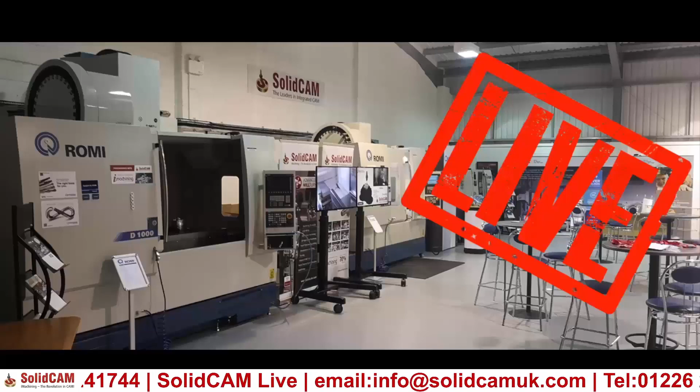Today we have a selection of partners for you with machine tools, cutting tools, work holding, measuring, simulation, testing, and together we'll be demonstrating how we can collectively show you a total solution for manufacturing and machining. So throughout the event we'll be using SolidCAM software, showing the various strategies and including our powerful iMachining for fast metal removal.

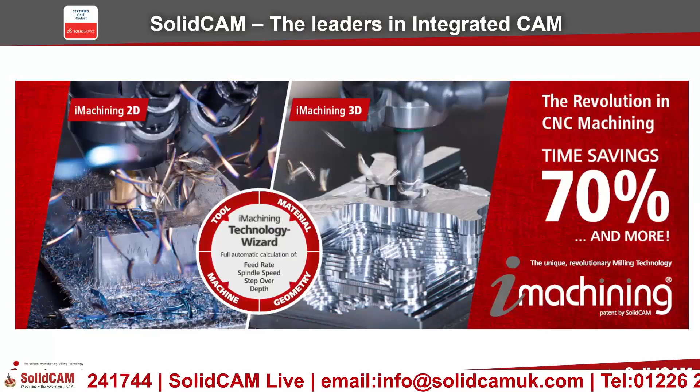So we're just going to have a quick look at how we've programmed the iMachining inside SolidCAM, and a little bit more about what iMachining is first of all, and then we'll come back live. We'll be able to see the machine cutting and have a look further into the software. So we're first going to have a look at a presentation of SolidCAM, its features and benefits, and we're also going to have a demonstration inside the software of the part that's been programmed for today's seminar, how it's been programmed, and then we will cut back to the cameras in the machine to have a look at this being cut live.

So SolidCAM are leaders in integrated CAM. The major benefits of using SolidCAM inside SolidWorks are that we have the same look and feel through a seamless single window integration. There is full associativity inside SolidWorks as well. So any model changes that are made will automatically update the toolpaths in SolidCAM.

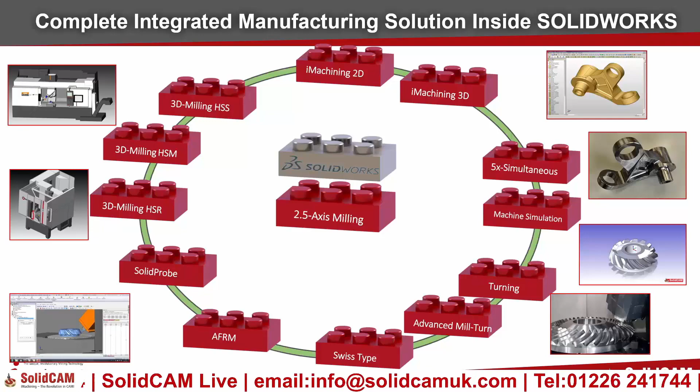SolidCAM is working inside the SolidWorks assembly mode to define fixtures, tooling and vices, and we've also been gold partners with SolidWorks for the last 17 years. We have a complete integrated solution inside SolidWorks. We are a modular system, so we can add the specific modules needed and when needed as well, so you don't have to have all the modules all at once. If you buy a new machine and need extra modules, these can be plugged in afterwards.

Moving on to our iMachining module. So this is our high-speed roughing operation inside SolidCAM with a technology wizard built in as well. So we get increased productivity due to shorter cycle times, up to 70% and more cycle time saving. We dramatically increase the tool life and unmatched hard material machining as well.

We see outstanding performance when using small tools, and we can use iMachining on 4-axis machines, 5-axis machines, mill-turn machines as well. High programming productivity and a very short learning curve. The unique wizard will optimize the feeds and speeds for you, including the depth of cut based on the stock and the tool material, as well as the machine specifications. So this takes the headache out of programming these high-speed roughing operations.

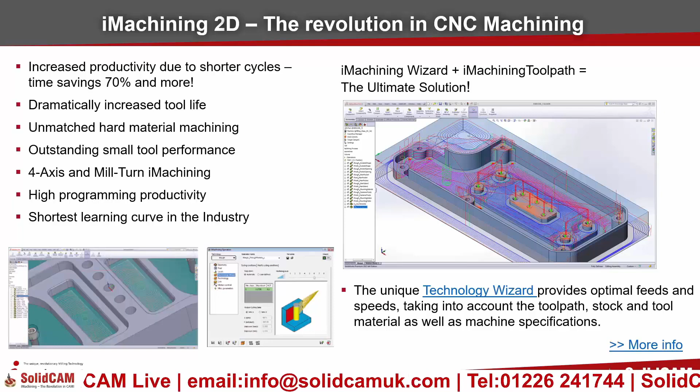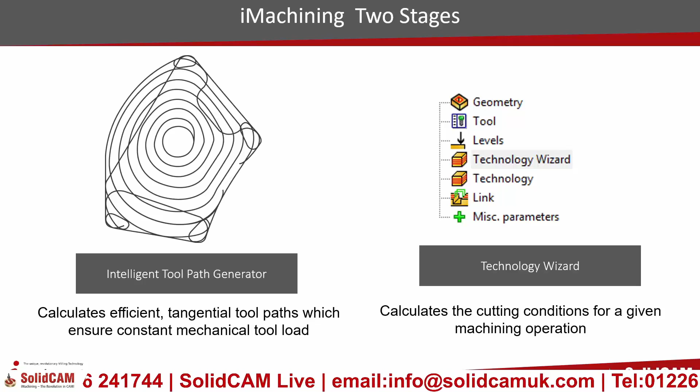So iMachining comes in 2 stages, all built into the same operation. The first stage of iMachining is to create an intelligent toolpath, so an efficient tangential toolpath which will ensure constant tool load on the machine. And then the second part of iMachining is the technology wizard. This will calculate the cutting conditions for any given machining operation. So this will calculate things like the speed, the feed, the depth of cut, and also the cutting angles.

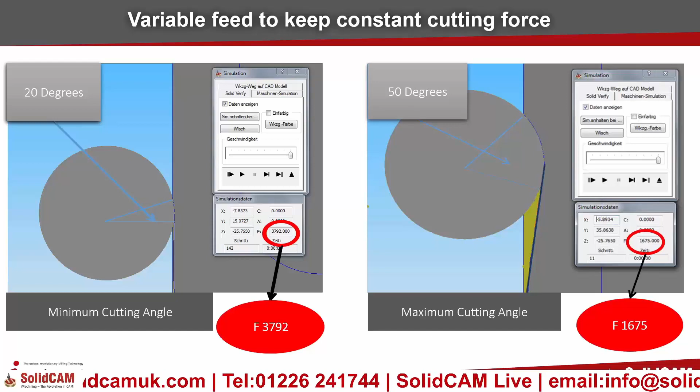So optimal speeds and feeds for iMachining. So the technology wizard will calculate these speeds and feeds for you based on data that we have initially entered. So we would enter the material properties. We obviously select the geometry that we want to machine. We have the tool geometries and we put in the machine parameters. This will then calculate all of these that we see in red here. So the technology wizard will calculate the depth, the feed rate, the step over and the spindle speed, all synchronized together.

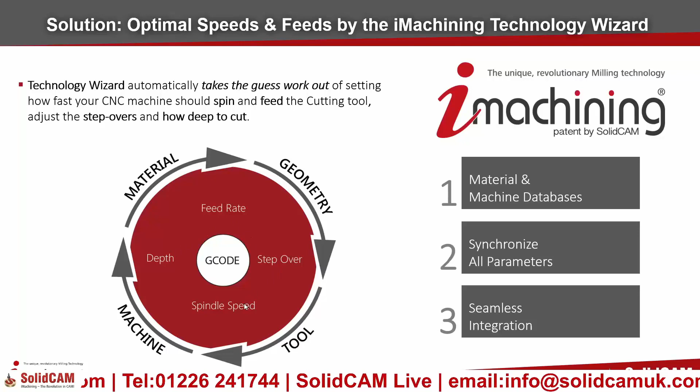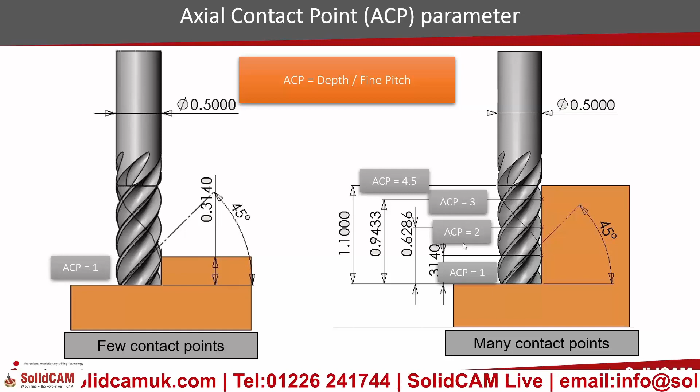Now this will produce vibration based on the fact that the tool has load and there is a flex point at the top here. With this one here, we're in full contact on the left hand side here. Now the cutting forces are only now in one direction, to the left. On here an ACP of 3 would be fine as well, so we're looking for an ACP closest to a whole number as we can, and again iMachining will calculate this for us.

iMachining is a patented technology. No other system can use our technology. You may see other systems using the spiral or morphing toolpaths, but you won't see any system using a spiral toolpath and also calculating the speeds and feeds and depths of cut using our technology.

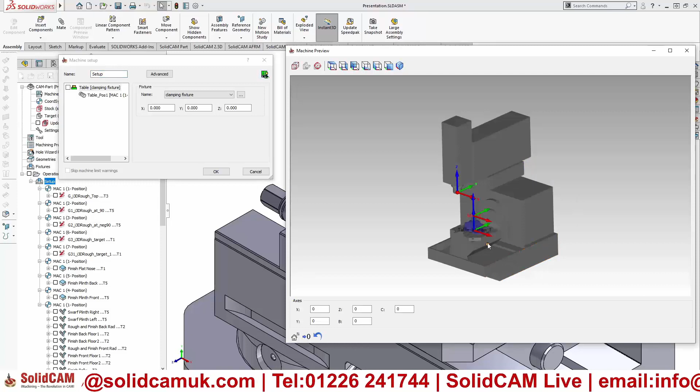So let's have a look at a demonstration of the component that we're actually cutting live on the machine today. So this is the component. You can see it's all set up in SolidCAM. If we have a look at how it's been set up on the machine, you can see here we have it in the vise and we have this round billet stock sat up in a vise.

So we first want to rough out all the material, leaving the rough shape of this component. So we're going to use iMachining, 3D iMachining. The stock is automatically calculated, and the tool we're going to use for this today is the Fen 12mm end mill. So for iMachining I need to set up the iData, which means we need to tell it what the helix angle is and the grade of carbide that we're using. We also told it the material we're cutting, which is the EN24T.

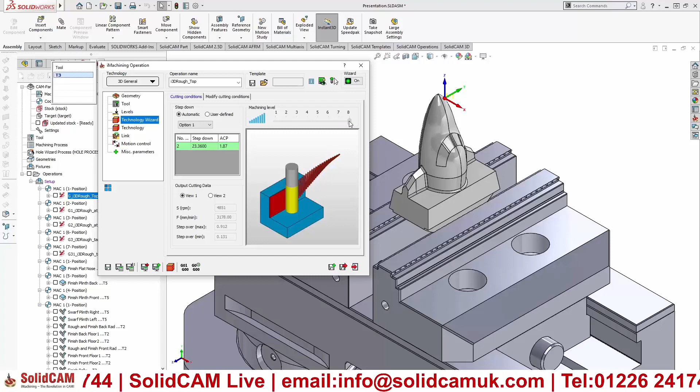And you can see here iMachining has calculated 2 step downs, 23.36 depth of cut. We're in the green, which means we should get no vibrations. Now this is the machining level, so you can see as I slide the machining level up and down, the speed, feed and step overs all change with each other, so they keep the relationship between each other, maintaining the cutting conditions.

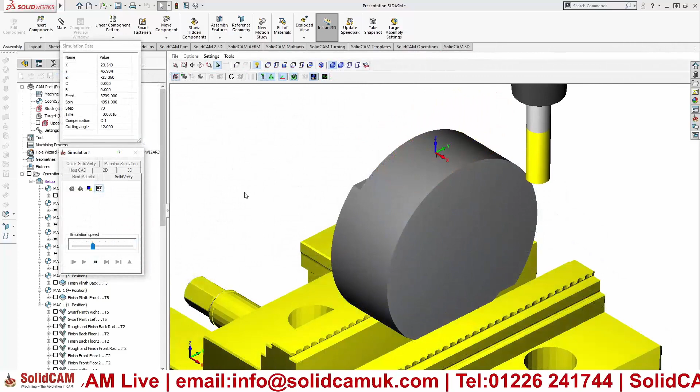So we can see this has calculated the toolpath with those 2 depths of cut. We've also got a scallop on there of 0.5 as well, so we take the large depths of cut first of all and then we go back over the job, leaving a 0.5mm scallop all the way around the shape. So you can see here this iMachining working. You can see it live at the bottom left hand corner of the screen there.

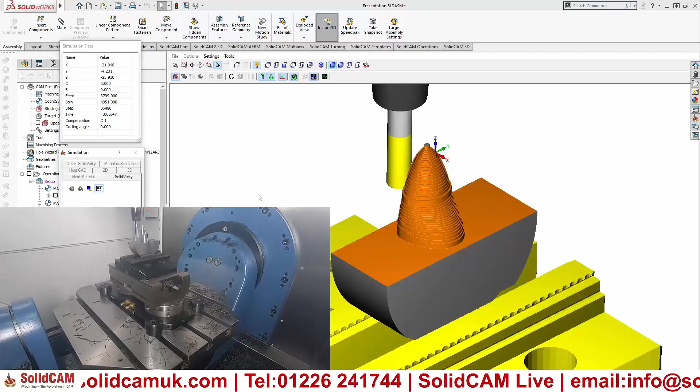So you can see the chips come away nice. This is full depth of cut, high feed rate and a small step over. So on here we're looking at roughly around about 10% step over, and like I said, we're at the full flute length on the depth of cut. You can see it there creating a scallop, so the 0.5mm scallop on the component.

Now iMachining works in 3+2 as well, so you can see here now I've got the datum position pointing at the 90 degree, so we're going to rotate the axis over 90 degrees, again using the same tool. I've got the machining level up to the top, we're nice and green, so we're going to calculate that toolpath, and you can see the toolpath's been generated.

We're now going to cut all that stock from this position here. So again, it's stock aware, we've not got any fresh air cuts, we're actually going to only machine where there is material. And you can see it's doing that 0.5 scallop on there as well again. So we'll maintain a nice shape for finishing on the component.

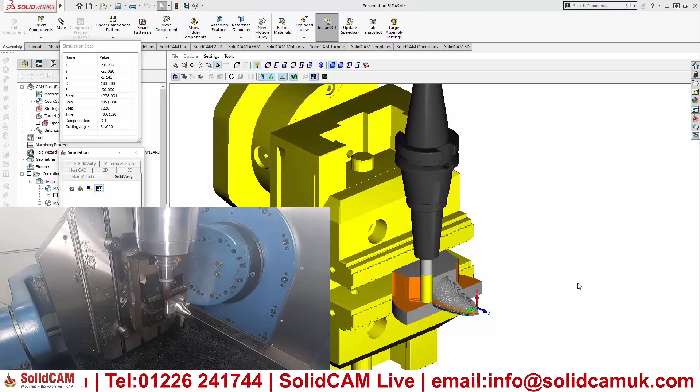You can see there it's getting into all those areas that we couldn't get to when we were at the 0 degree position. We're collision checking against the holder and the vise as well.

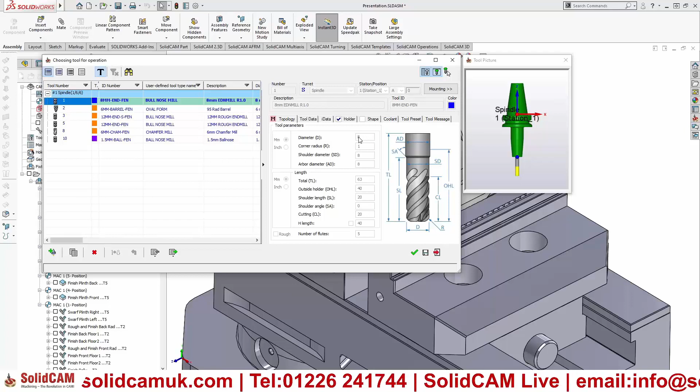Now this is iMachining, 3D iMachining, and again now we're around at 90 degrees and we've also spun the C-axis 90 degrees. This time we're going to use an 8mm end mill from Fenn. Again, we've given it all the helix angle and the grade of carbide and the material it's cutting.

So this is, again, because we're fully stock aware, a little bit like rest roughing, because we're going to now rough out with that 8mm tool wherever the 12mm tool couldn't get to. So you can see here we're just going to nibble away and really take those little tight areas out.

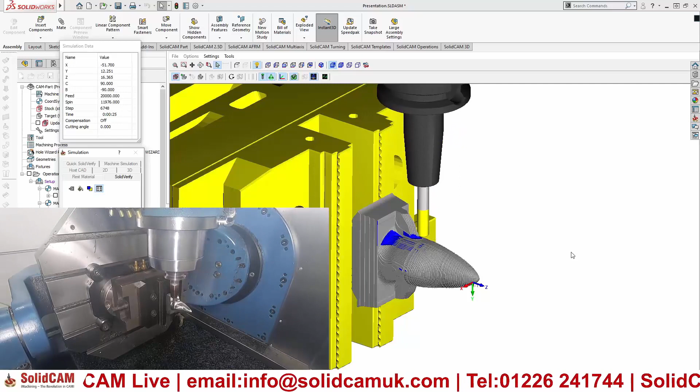Now you can see the cutting down at the bottom left hand side, that is full speed, that's not been sped up. The maximum feed rate on this toolpath is about 20,000 millimeters a minute. So let's have a look at this cutting live on the machine now, and we can see iMachining running.

Yeah, thanks. So as you can see, the machine's running. We're running iMachining, as you saw in the demonstration there. So this is the 12mm end mill from Fenn. We're running at 183 meters a minute, 0.08 chip thickness. We're at 23mm depth of cut with this tool.

So we're quite using all the flutes. You can see we're tipped over at 90 degrees now. You saw some of the simulation and live cutting in the presentation there as well. So we had a couple of questions come in while we were watching that presentation. What's the difference between iMachining and other trochoidal software? I'll let you answer that one, Mark.

Okay. Well, as people are probably aware, a lot of software now has got similar looking toolpaths within it. And hopefully in the presentation which you've just seen, some of the differences will be highlighted. But let me just recap on those, because there's probably two fundamental differences between iMachining and, if you like, standard trochoidal type cutting. The first one is actually in the toolpath itself.

Excellent. But obviously you just said that you started off supplying tools. At what point did Fenn diversify into actually manufacturing their own tools then? Well, we used to actually design some tools and then get them made in Switzerland or Germany to our design. But to be honest, it was a long-winded affair. For example, you could make a product, we'd get it manufactured, and then you'd realise you want a few tweaks to it. So it was 10, 12 weeks every time. So in 1999, we invested in our first TX7 and a TGX from ANCA. Right. And then we went straight into manufacturing.

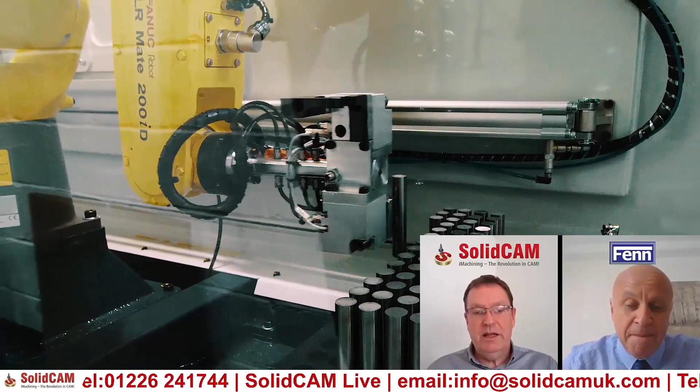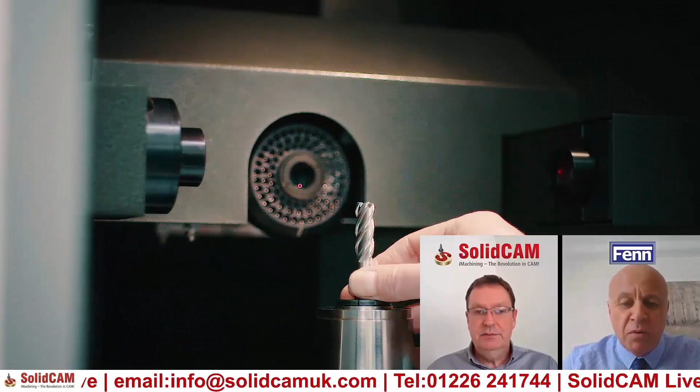Oh, wow, fantastic. And what kind of capacity do you have currently to offer to your customers? What we have now, we have 3 FX7 linear machines. We have 3 ANCA MX7 linear machines. And then we have a couple of older style ANCAs that we use for the roughing operations. Coupled with that, we also have a Roby centerless grinder, and there's several other what I'll call second op machines to do small processes like necking, backing off, etc., where it's not really worth tying up your CNC capacity. So we're now manufacturing on a shift system and working very, very well.

Fantastic. And obviously you're diversifying as to what you manufacture. Could you tell us a bit about what products you are manufacturing at the moment? Yes, certainly. We actually manufacture under the FETOGA banner. The FETOGA banner is actually an anagram of Fenn Tool and Gauge. It's funny because we've had lots of companies go to Companies House to try and find out where we're buying this in from, and then they realise that it's actually our brand name. So we have the A-line, which is a dedicated high-performance range for aluminium.

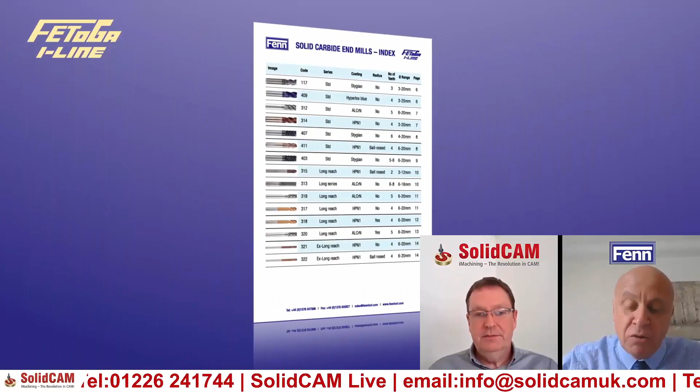We have the I-line, the FETOGA I-line, which is for the inox materials, the stainless steels, etc. And then we have the U-line, which is pretty much a new catalogue, but it's actually adopted all of our universal product. And also we make some specialist high-performance thread mills, and also lots and lots of specials that are made to customers' requirements.

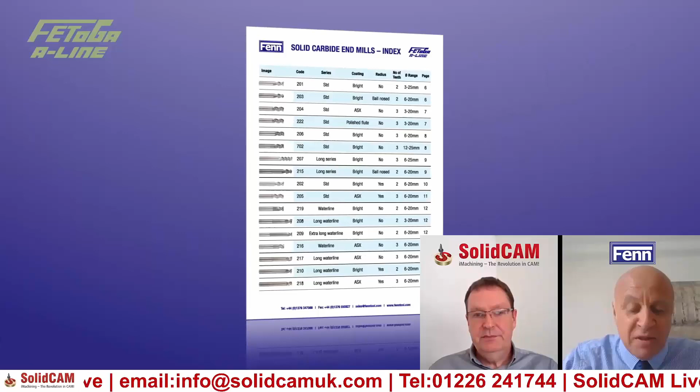Fantastic. And is there a particular market that you target at all? Well, mainly the UK market is our biggest market, as you can imagine, where we have 10 sales engineers throughout the UK. In Ireland, we also have a sister company, Kildare Tooling. We have 2 sales engineers over there, and we sell again direct to end users over there. Right. Also in Southeast Asia, we have agents in Malaysia, Singapore, and a new one in Vietnam. And we also have many other direct accounts in Thailand, Mexico, Korea. There's many. So yes, it's a growing market.

It sounds fantastic, and like I said, the support that you guys give us is brilliant, and we really enjoy working with technical partners like yourself. Just leaves for me to say I'm so grateful for you giving your time up today to do this interview. No problem. Look forward to when we can actually meet up again in person once all these issues are over, as it were. Terrible, isn't it? Fantastic. All right, Gary, thank you ever so much. Thank you.

Yeah, thanks for your time there, Gary. I know you offer us a lot of support with this project and the tooling and other projects as well, so we do look forward to working alongside you again.

It's great. So we were still iMachining there with the 8mm bull nose cutter that we've got there. A couple more questions have come in relating to the iMachining. How does it improve tool life as well? Well, the fundamental basic of it is the tools have been designed to machine in a certain way. iMachining just allows them to work exactly as they were designed to be cut. Cutting on the full flute of the tool, smaller step overs, fast feed rates, fast spindle speed, exactly as the tool was designed to be cut.

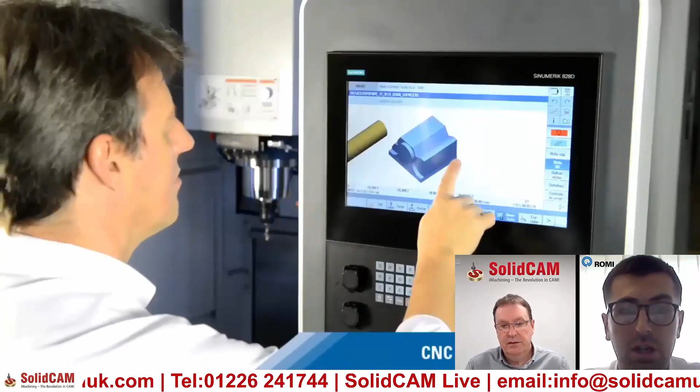Okay, and are these 2 machines, are they similar structure? Yeah, similar build, similar structure, castings the same. So we have options 12,000 and 10,000 RPM, BT 40 spindle, ATC can hold up to 32 tools. The rapid travel is 36 meters per minute.

We have an X travel on both of them at 620 mil, a Y travel at 520 millimeters, a Z travel at 460 millimeters. But very, very similar in spec. The only difference is one is 3+2 and the other simultaneous. Okay, that's cool. Do both machines have the same control on them?

Yeah, so we offer the Siemens Sinumerik 828D control. We find this is a popular control in the market. It offers conversational programming, which a lot of people like, for simple machining operations. So you drill, you tap, your facing and so on, and then for simultaneous work, it's got some nice features on there for high-speed settings control. So it's got a varied option for both 5-face machining and simultaneous.

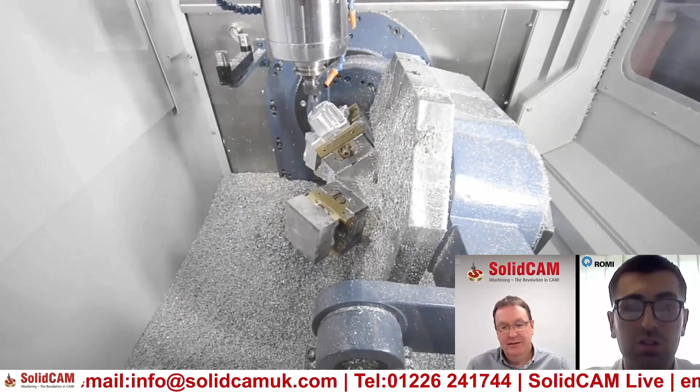Yeah, but obviously in full 5-axis simultaneous you need a great CAM system to be able to drive it, and that's where yourself comes into it, SolidCAM. Absolutely. So yeah, it all depends on the post and making sure the post is right to the machine. But very easy to upload the program from a CAM software, and both 5-axis machines are very accurate. The XYZ have linear guideways for accuracy. So yeah, very accurate machine.

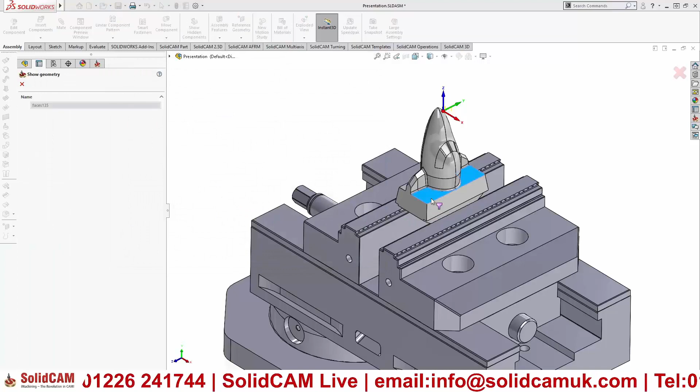To show you some of the 5-axis strategies we've used for this component today. So the first strategy I want to show you is the parallel to curves that we've used on the face of this job. So we selected a single face to machine, and I've selected a single curve to follow, so we're going to stay parallel to that curve. The tool we're using is the barrel cutter. This barrel cutter is a 95 radius on the outside, so 6 diameter, 95 radius, and we also have a 1 mil radius on the bottom of the tool as well.

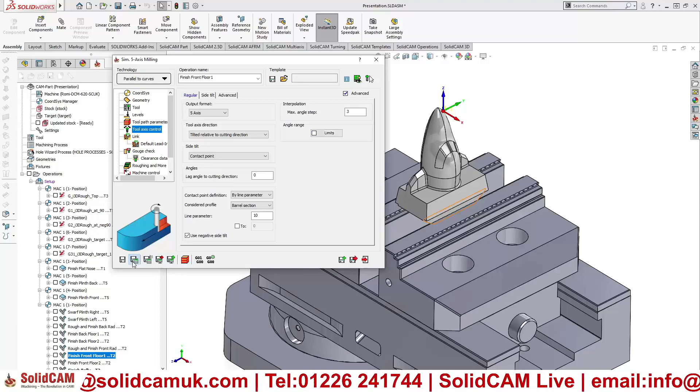So on the toolpath parameters, we can see we have a 2mm step down with the barrel tool, and we've told it we want to climb mill as well, so we should always climb with the barrel cutters. And then instead of tilting over at an angle, I'm telling it to use the contact point and the barrel section. So we're contacting the geometry with the barrel section at a given line parameter, in this case 10%. So you can see here we sweep across the face, leaving a nice finish on that face, again using the 95 rad.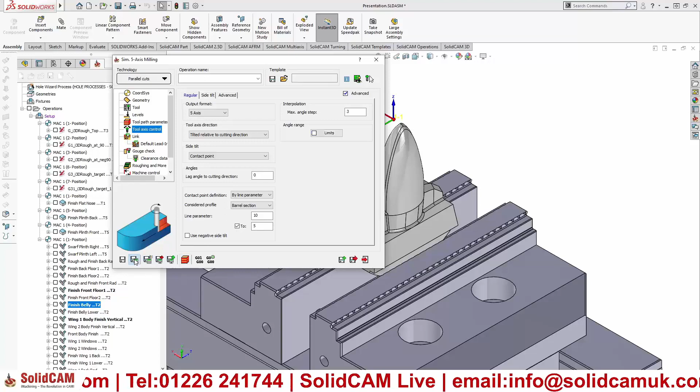So in this case now we want to finish the underneath belly. Again we're going to use parallel cuts this time, so we're simply going to select the face. I'm going to tell it to work around the Z-axis using a constant cut. We're using the same tool, the 95mm radius tool. Tool parameters this time, we're using a 1mm step down because we've got curvature on the face that we're cutting, and we're using climb milling again. And this time we're using contact point barrel section, and we're varying the cut between 10 and 5%. So as we go down the face we're going to rock over the barrel, so we're not using the same contact point on the barrel all the time and wearing the cutter out in one spot.

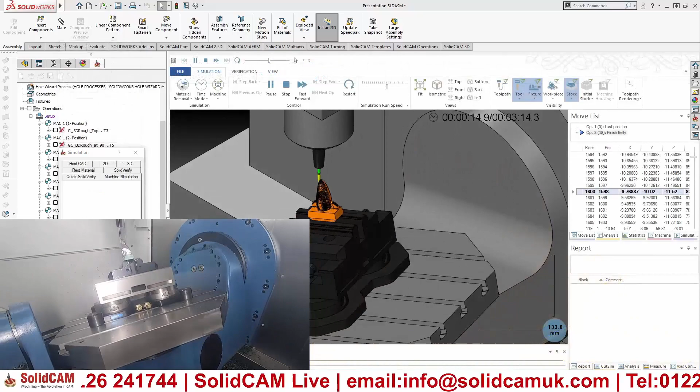So you can see the toolpath there has been calculated, and you can see I've got a nice sweeping link move back as well rather than lifting up and down. You can see it there on the machine as we swing around that face. You can see it in machine simulation also. So we're cutting in one direction and we swing back around clear using the link moves that have been set up.

So the final strategy I want to show you is the same strategy as before, parallel cuts. This time we want to do the front of the component. I'm going to do it half at a time, so this first half here, again using the same barrel cutter, and again 1mm step down with the climb milling and the barrel section. Now what we need to do in this case is add some gouge protection, so I'm checking the tool against the drive surface that I've selected and also this second surface, and telling it to trim and relink the toolpath. And I'm also checking the tooltip against the wing there as well to trim and relink the toolpath, and told it to stay away from that face as well.

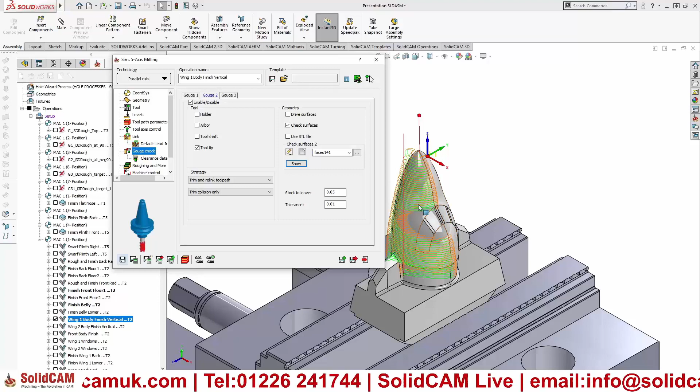So if we calculate that, you can see as the curvature of that surface comes right in near those windows, the tool's unable to get down there without gouging, so the toolpath has been trimmed and then relinked to where it can actually fit in. And we'll come and do another toolpath to do just over the windows separately afterwards.

So you can see this in simulation, and again on the machine down the bottom left hand corner there. Again we're using them nice smooth blend spline link moves as we go around. So we go in the cut direction and then we swing back round clear of the job, and we can see that in machine simulation as well. You can see it doing exactly what the machine is doing down the bottom left hand corner.

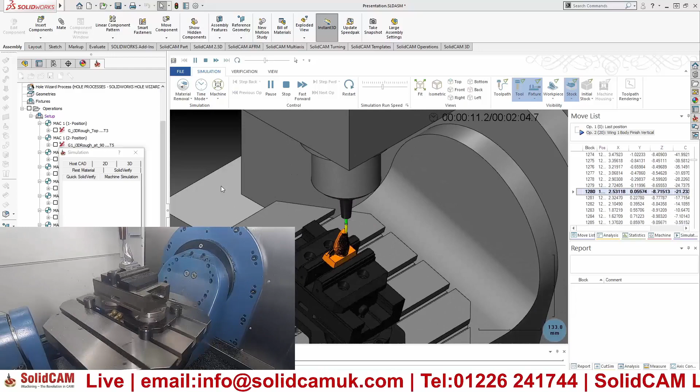So we can see this barrel cutter working live on the machine. Let's go and have a look at that now.

Yeah, so that was the presentation on the barrel milling and the 5-axis simultaneous, and now we've programmed the toolpaths on here. So the questions that came in, one was, does SolidCAM have specific cycles for barrel tools? So I went through some of the operations in there. We do have some dedicated options for barrel tooling, and there's some dedicated cycles in there as well, or operations should I say, in the software as well.

I did also touch on mirror machining as well, and SolidCAM supporting mirror machining. One of the questions is, can all toolpaths be mirrored, and does the toolpath get reversed as well? I'll let you expand on that a little bit, Mark. It's a very simple question. Yes.

There's options within all cycles available on there to mirror the entire part or mirror individual operations within the part. What it does is generate new operations and automatically reverses the cut direction for you as well. All the angles, all the 5 axes is all reversed. So if you're working, say, in automotive or aerospace type works, where you've got a left hand and a right hand component, within a few clicks you've got that already done. You just program the one side.

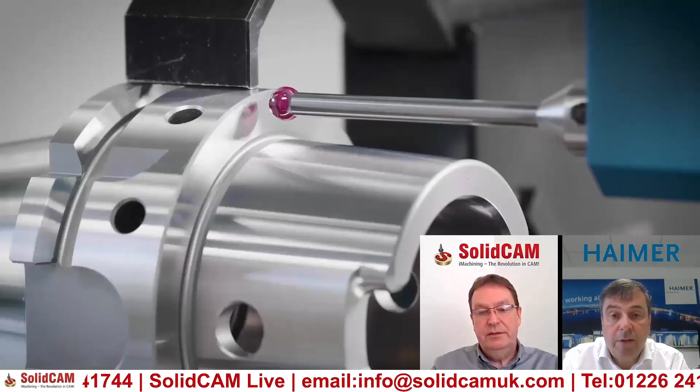You just mentioned there about the CAD drawings that are available. Are these available from your head office for all of your holders? Yeah, you can just download them. It's a free service. You have to make a registration. But once you've done that, then you can download any drawing, any extension, any cutting tool, so you can build up the assembly ready to go, ready for your CAD/CAM process.

Right. And one of the things that we noticed as well when we were setting tools up is if the tool's not balanced, it can have a massive effect on the performance of the tool and the outcome of the finish. I know balance tooling is something, again, that HAIMER specialise in. Could you just talk us a little bit through that?

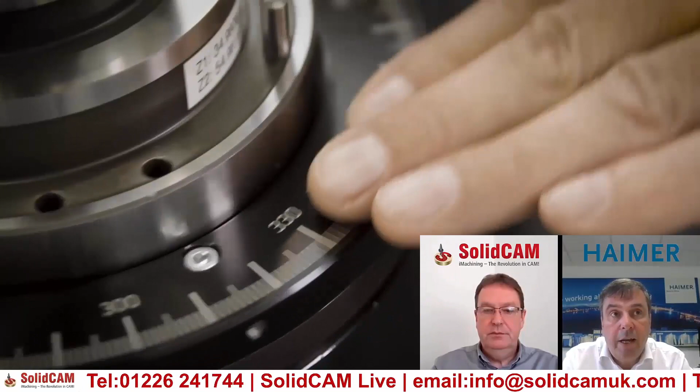Yeah, one of the things that we see, if we can take mould and die as a good example, is that we're really trying to achieve the best surface quality we can in one pass. And if we can do that with a balanced tool assembly, we have a good chance that we have no vibrations going through the tooling, so that we can really go from a roughing situation, sometimes even reduce the need for a semi-finishing operation, to go straight to finishing and achieve the surface quality you need. And only when the whole assembly is balanced can we guarantee that.

Right. And I suppose the tool holder geometry plays a large part in that as well, does it? Well, this is the thing that we have. We have what we call our power shrink range, for instance, and here in this case we add mass to reduce vibration. Right. So when you see the performance between a normal slender chuck and a power shrink chuck, it's really like night and day. And if we can really eliminate one operation, you can only imagine the potential savings in that.

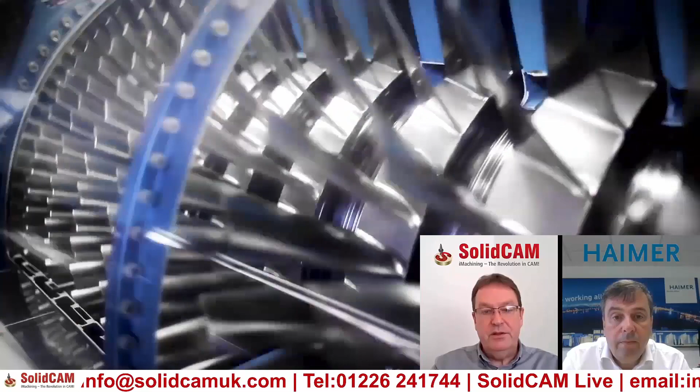Yeah, absolutely. I've always been very impressed with the gear that you guys provide. Phil, it's been brilliant to talk to you, and we do appreciate the support of HAIMER. It's critical to what we're trying to show at our tech centre as well. So for now, I'd just like to say thanks very much, and I look forward to when we can actually meet up and do a live event together. Okay, well, thank you for inviting us. No worries, thanks for that.

Thanks, Phil. Good little explanation of what you do there as well. Obviously we're using the heat shrink holders today for this seminar. Really good holders, and some good stick out on them for the 5-axis. So we've got as short a tool as possible, but we've gained the length by having the long series holders on there as well. So while this is still barrel cutting, I just wanted to talk a little bit about the technology centre we've got here, and what we do from here as well.

So this is where we're all based. We have a team of engineers based here, where we do support from this building. We do training, we do site visits and things like that. We are all based in this central location here in South Yorkshire. So we deliver support to our customers. We do that through the web or on the phone. We can do remote sessions. We can help you out in any way possible.

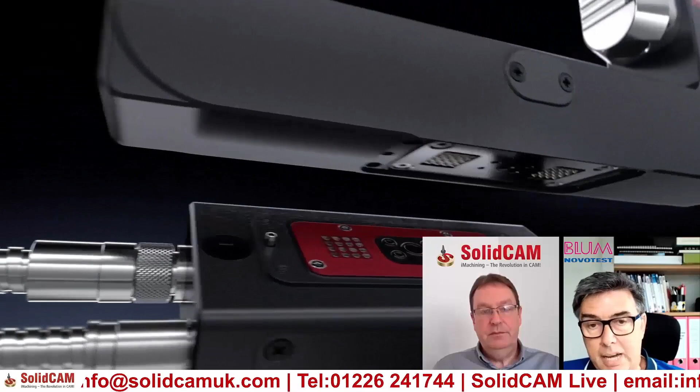Yeah, thanks. I want to talk a little bit about LC Vision. As you said, Paul introduced our brand new laser system, the LC50 Digilog. And LC Vision is the application suite that's going to run concurrently with that new product. So it's absolutely brand new, hot off the press. It's a suite of applications that allow you to get the most out of that new laser, that new Digilog technology.

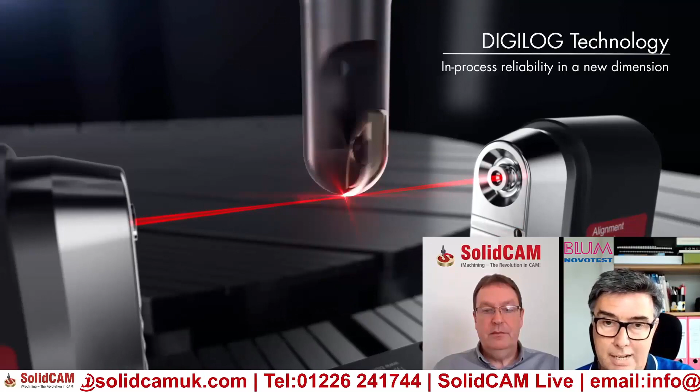As Paul had introduced, the laser system, which Blum is probably well known for, now incorporates a Digilog concept, which, to break it down in summary, allows us to capture much more cutting tool information in a much faster time. And so coupled with the LC Vision application suite, we will now be able to offer so much more functionality and applications for customers to really control their tool geometry on CNC machine tools. Okay, and are there specific benefits that the customer is going to get from the LC Vision product? Yeah, absolutely.

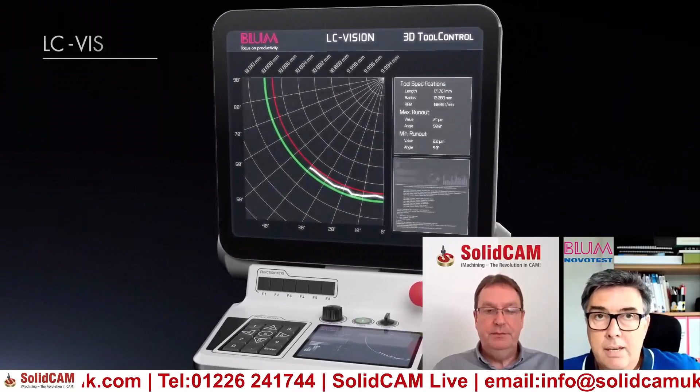Because we can capture so much more data now, it's possible to not only be able to measure and check our tools live on the machine at the live cutting speed that you're going to be operating with, but also to allow you to put that into compensation. So you can start to take that data and use it now to apply to correct your tooling live on the machine in a much, much faster way than was ever possible previously.

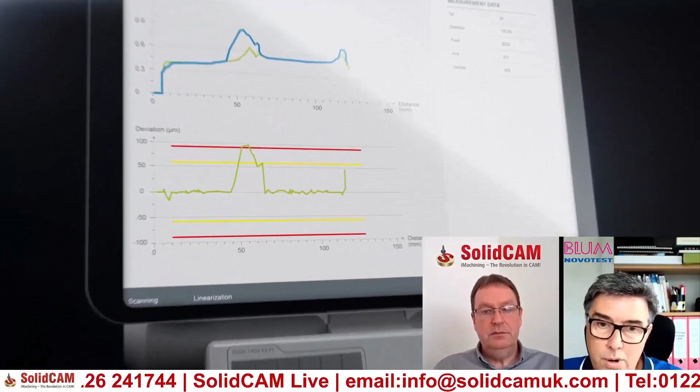That's brilliant. And do you think that this product now fits into today's drive for automation and Industry 4.0 then? Yeah, absolutely. That's the key to it really. With previous tool measurement systems for machine tools, you've been able to capture data, and then that data can be written into tool offset files, and then operators or programmers can take that data and use it how they need it. But really everything nowadays, allowing us to become more productive, more accurate, to get more out of every machine tool, is the ability to be able to see that data live.

That's the first part of it. But then to act on that data, to actually do something with it in an autonomous way. So the operator, the programmer now doesn't have to get involved. The system can be self-sufficient. We have an adaptive solution, which kind of fits along the line of what you guys at SolidCAM are all about. So it fits into that adaptive element to be able to machine parts, auto-adjust it live in the cut, faster than we've ever been able to do it before. Well, our tagline really is that every part coming off the machine is a good part. We don't have to rework, we don't have to scrap any components.

Right. And do you see the development of the LC Vision software moving into more functionality and benefits for the customer? Yeah, at the moment, the first launch, it's brand new, hot off the press. There's basically two applications that we can run with it. What we call 3D tool control, which is being able to measure and fully compensate for round geometry, so ball nose mills and things like that. We also have a spindle control application, so we can start to monitor the spindle in a machine. So if a customer has a bit of a crash, or as part of the service requirement of the machine, the spindle now can be checked and adapted and scheduled for maintenance.

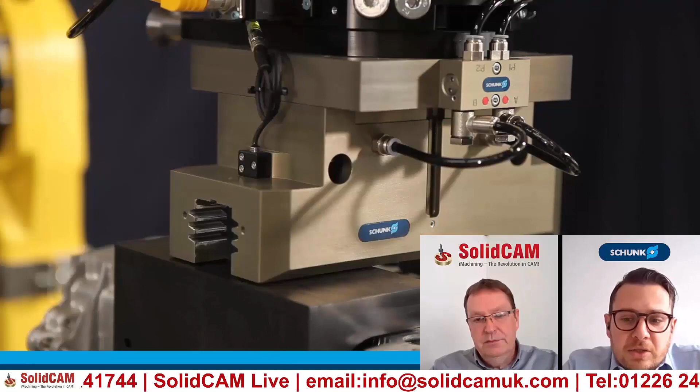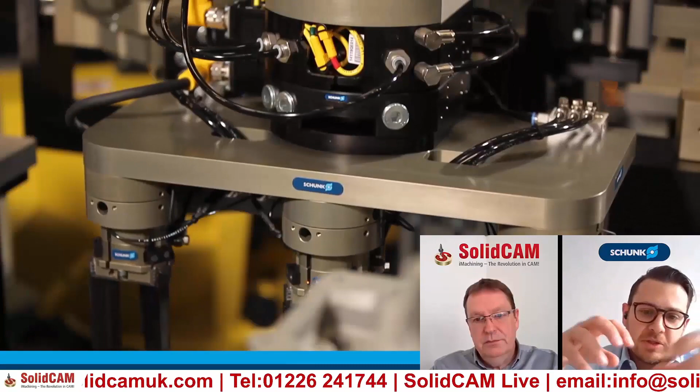Schunk has grippers, tool changers, and if you come in from the CNC, tool changer means something else to you, but tool changer for us means the end of arm they put in a robot that can change the gripper for you and all that kind of stuff. So we have a whole suite of solutions that goes from the end of the robot to the table of your machine.

And one thing that is trending, the buzzword at the time, I guess, is machine tending or machine automation, depending on who you talk to. And we are heavily involved with that kind of solution. And again, it's something that we want to see more and more, especially now with the Corona thing. I think people are more tuned up to that thing. If you had automation before the whole thing kicked off, you'd probably be better.

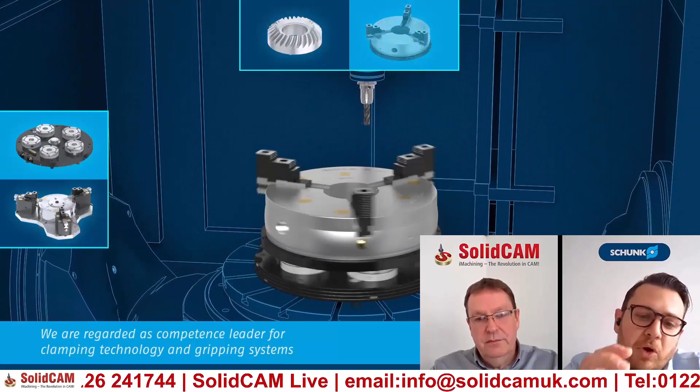So when it comes to machine automation, we kind of split it into 4 big groups. So we have a solution that is unique to Schunk, we call lean automation. We have a module that you can put a gripper inside your CNC machine, like a 5-axis. That module would have a gripper attached to it, and that can go into your tool changer. Right. Okay. So you could have the spindle of your machine coming down, picking up the part, putting it to the side, and picking another billet and putting it back into the vise. Oh wow! Using a spindle. Yes. So you can automate using your machine.

That wouldn't lend itself so well for a 5-axis machine, given the limitation on the table area, because you do have to sacrifice a little bit of that table area for your billet and finished parts. But for a 3-axis, for example, it's a fantastic solution. Starting from £5,000, you can automate your machine without any robot. Wow. Then you could move into your collaborative robots. Again, another big buzzword all the time.

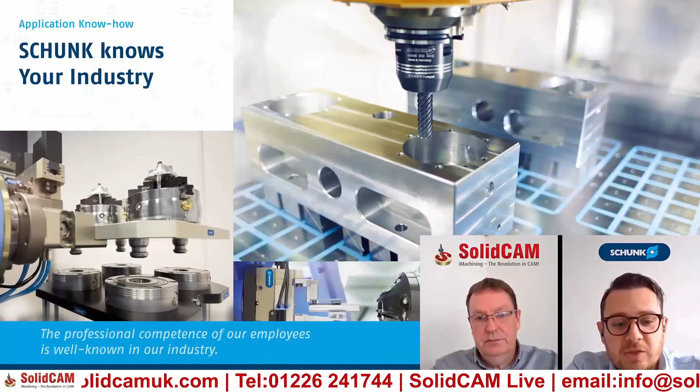So that's when a zero-point system like we have today and an automated vise, like a hydraulic vise or pneumatic vise, which we also have, would be essential for that kind of application. So you have a cobot that drops the part into your vise, the vise self-clamps, and off you go, and then it just picks that part and loads another one. So that's kind of stage 2. That solution would cost you about £20,000, including the robot and everything else.

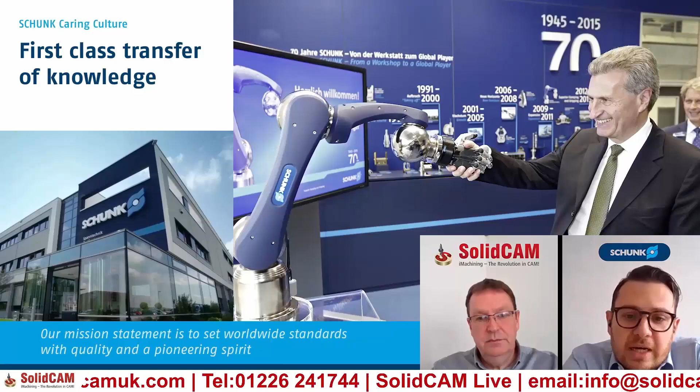Then you would have what we call stage 3, which is the off-the-shelf automation systems. People probably know Cellro, RoboJob, Halter, all these guys. They offer a bolt-on off-the-shelf solution that will handle the parts for you. We tend to get heavily involved with that as well, with the workholding solution and the end-of-arm tooling for them. And then you have the final stage, which is the custom-made kind of solution.

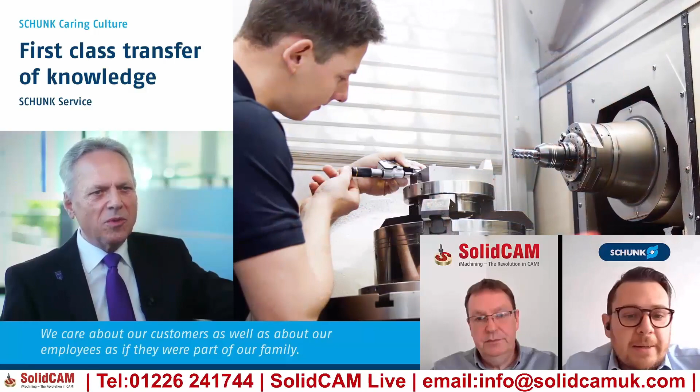So normally you would be talking to people like ABB, Fanuc, KUKA for that kind of solution, and really the sky's the limit. You could do literally anything with that. Have one solution that would be handling 3 or 4 machines at a time. So when it comes to machine automation, there's a lot to learn, and we are not integrators. So we would be only supplying the workholding solution, the end-of-arm solution.

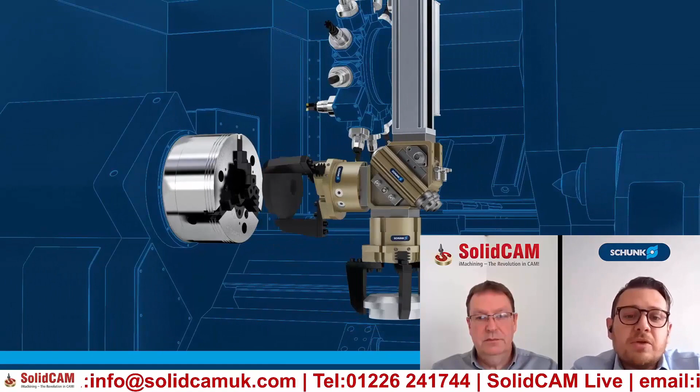If you start with the lean automation, you don't need any integration. If you go into the collaborative system, you might or might not need some integration. If you go into the off-the-shelf, you're already buying that from an integrator, so that job will be done for you. And if you go to the fully customized, you're definitely going to need an integrator. But what we try to offer, and we really push that, is we would love to do the consultancy for you. We will never integrate that solution for you, but we can definitely point you in the right direction. Okay. And do a bit of hand-holding throughout the process.

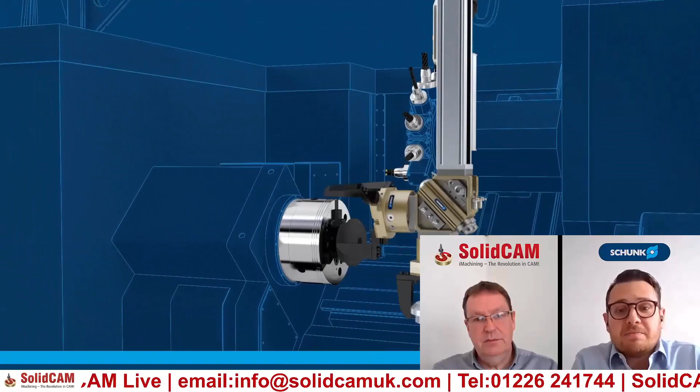So, it's a bit of a daunting thing, automation. There's very little standardization in this kind of industry. So it's good to have somebody who really doesn't have a dog in the fight. We do want to supply you stuff, but we are not going to push you into one particular way, because we always have some solution for you either way. So we would be very honest and say, now we start with a collaborative system that will have some limitations for you. Get your head around these, and then you can maybe move into a fully customized one in a few years' time.

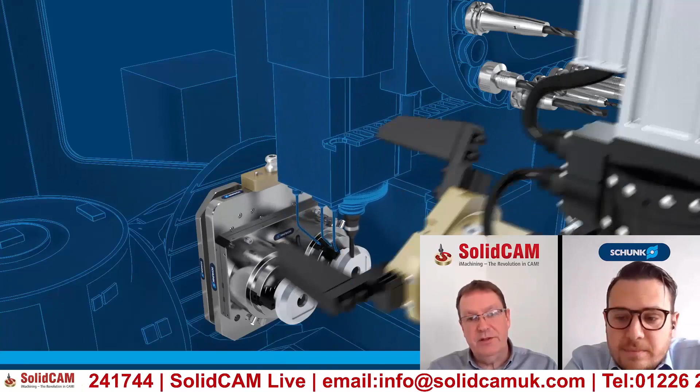We truly offer that, and it's amazing how little people actually take on our offer. I think it's really important that, we're obviously very reliant on our technical partners, and being able to offer this consultancy and collaborative approach, I think is very, very important.

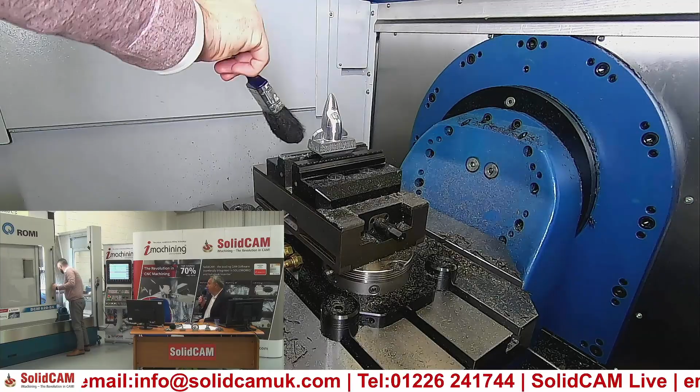Now, one of the questions which came in was what material it is, something which we should have told you right at the beginning. This is the EN24T we're cutting. One of the reasons is obviously we can leave the parts around for demonstrations or as exhibits, if you like, around our technology centre. So when we do eventually get people back into here, we've got displays of everything which is going on.

EN24T is a pretty tough material as well, so if we did get things wrong, it would certainly take the tool and it would certainly show you about it. So it's a good solid material to actually cut, and it maintains its sheen. Obviously people do cut different materials, so one of the things which we're very keen on is showing that as well. So probably in the new year we'll be showing a lot more different materials in these seminars as well.

Just a quick thing on the iMachining and materials. In terms of time savings, it varies obviously from machine to machine, to tool, and from material to material what you're cutting. What we're typically talking about is time savings around the 70% mark from conventional machining strategies. So that's what we're actually quoting. Now that will vary as the materials change.

So from softer materials like the aluminiums, you're still going to get time savings, maybe 30-40% depending on the part. But when you get onto the tougher materials, your Inconels, your titaniums and that sort of thing, then you're getting even bigger time savings. iMachining loves cutting these tough materials. The tools love cutting them if you cut them properly, which is what iMachining gives you. So you're then talking time savings up to 80-90% in some cases.

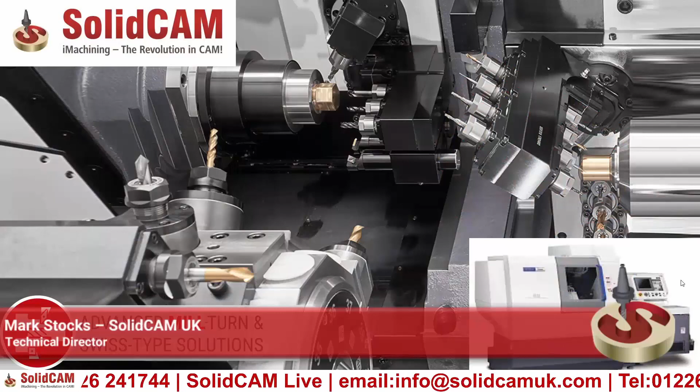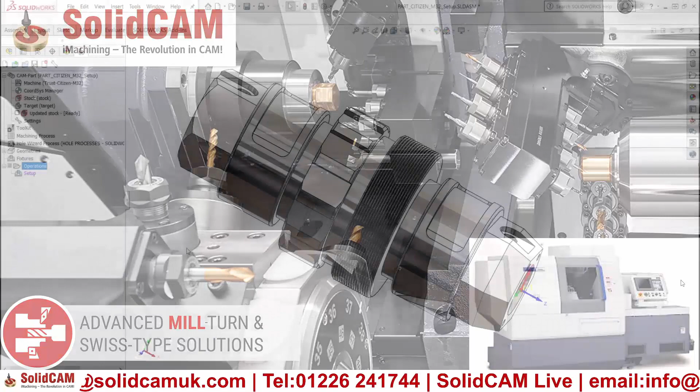SolidCAM support for Swiss turn is both comprehensive and simple to use. In this overview, we will be demonstrating this on a Citizen M32 machine. This machine is a 3-channel machine with 5-axis capabilities, multiple machining patterns and superimposition. All of these features are fully supported in SolidCAM with full machine simulation.

SolidCAM supports all tool holder types, including multi-station tool holders for both milling and turning tools. Tools can be moved to different stations and dynamically viewed to make sure the tools are set to the optimum position. Programming of operations is exactly the same as it would be for any mill turn machine in SolidCAM.

Here we are selecting the area to turn directly from the model and the tool from the library. The toolpath is then calculated with full support of cycles on the machine. As with all operations, this can be viewed and simulated as the machine will cut it.

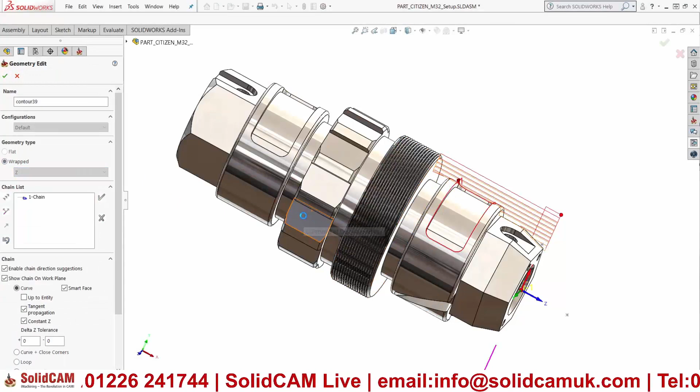Even adding more complex machining strategies such as cylindrical milling is kept simple. Select the area to machine direct from the model, the tool, and SolidCAM does the rest. Once the programming is complete, the channels can be optimized to get the best cycle time on the machine.

Currently the part is programmed as a single part, but in reality we want to be working simultaneously on both spindles. This is done by selecting the operation to start machining on the second spindle. Now we can see the operations working together in all three channels. Based on this, SolidCAM will automatically choose appropriate machining patterns which can be reviewed and changed by the programmer, as in some cases alternate patterns are available.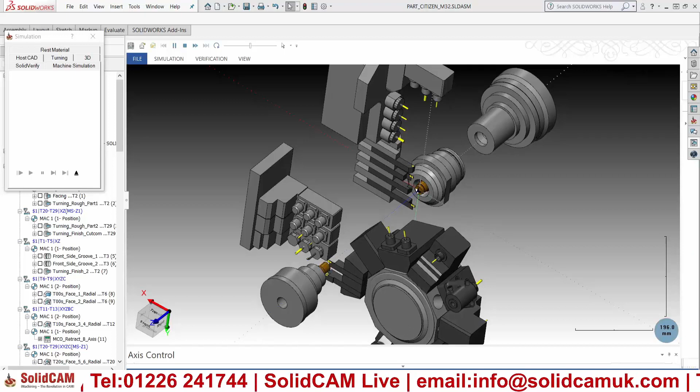The programmer has full control over the positioning of the wait codes, and SolidCAM will assist this by dynamically checking and advising any issues. Now the complete program can be simulated as it would be cut on the machine with all axes working together. This highlights any potential collisions and will show any superimposition moves programmed, giving confidence the program is correct before being passed to the machine. This can significantly reduce machine downtime.

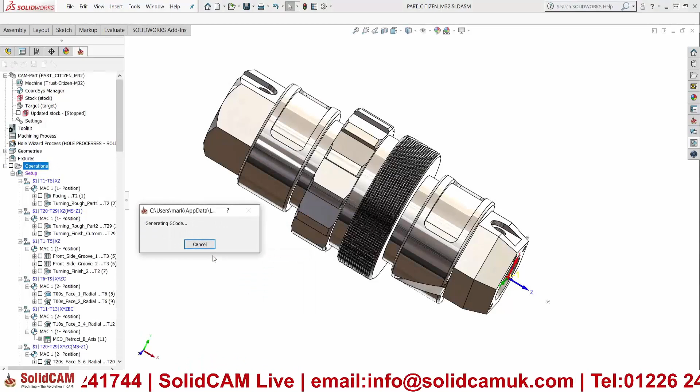Once this has been proven successfully, the G-code can be created in a single click. And here we see the result displayed in our SyncMaster software, clearly displaying wait marks and axis patterns.

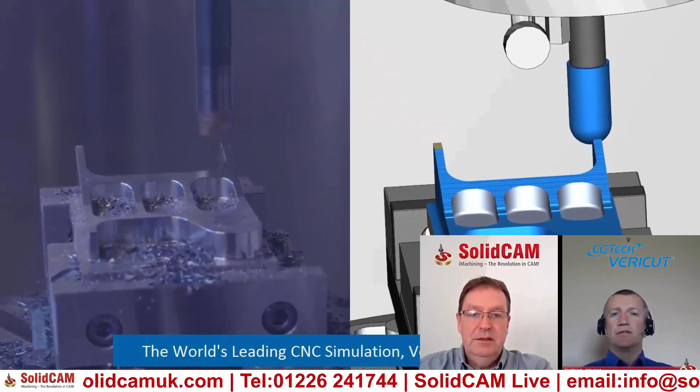I think one of the things within Vericut that people maybe miss are features that have been there for a while that can offer different efficiency tools and sort of hidden features. Is there anything you can tell us about that? Yeah, certainly, Ian. Like you said, Vericut's a very deep product, 30 years in development. So there are a lot of hidden features in there that our customers don't necessarily know about, so obviously they don't use them that often.

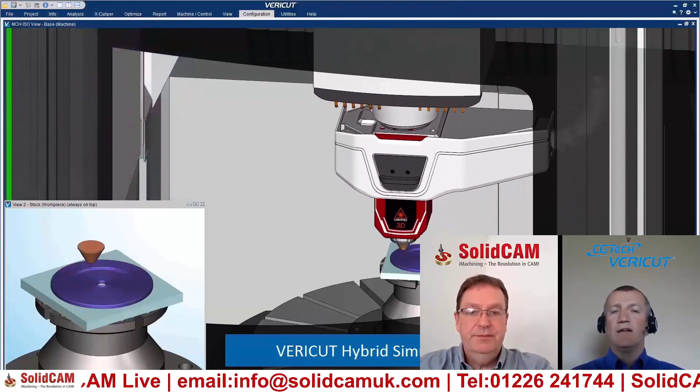But certainly when we get in front of the customers, we try and show them as much as we can. But because the product's so deep, it's not always that you get that opportunity. So just touching on a few of those features: there's a reporting function within Vericut, which is easy to use, easy to set up. It uses either HTML or PDF, or if you're familiar with Word, WYSIWYG, and that enables you to create good reports, inspection reports, as part of the process.

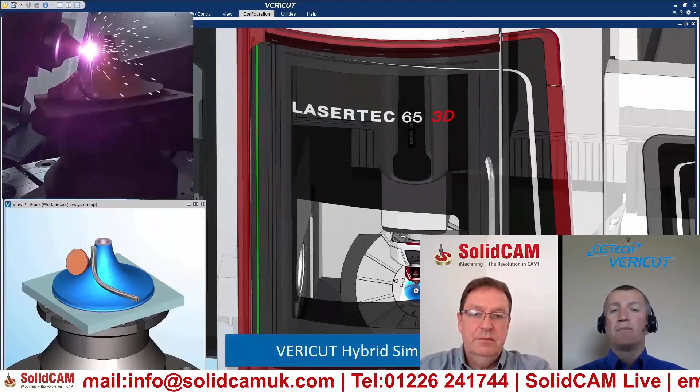So if you consider that Vericut is simulating your process virtually, there's nothing to stop us actually capturing that data and putting it into a report format. So there's that feature, which rolls on nicely to setup plans, and again that's a tool customers can access to make themselves more efficient. So that's a couple of them.

One of the things that people often ask for, and I know after being in the trade for a while, they'll have a program that's been posted out in one particular format. Is there anything that Vericut can do to help that? Yeah, so there's a post-processing tool in Vericut, which again has been there for years, Ian. It's just people don't necessarily know about it.

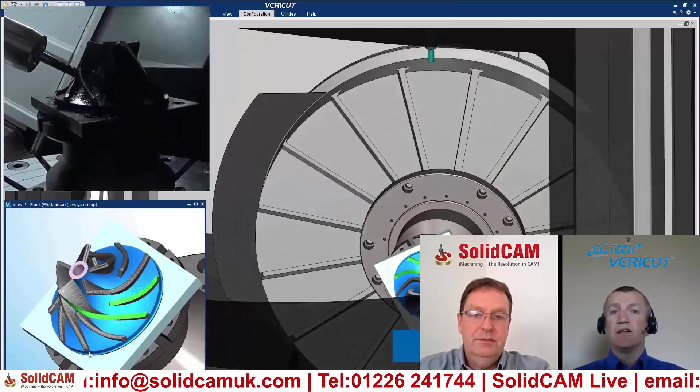So if you've got a FANUC program or a Heidenhain program and you want to switch that into Siemens, for example, then there's a post-processor built into Vericut to enable you to do that. And the beauty of that is once you've done it, you run it through Vericut to make sure there's no syntax errors and what the program's doing is what you want it to do.

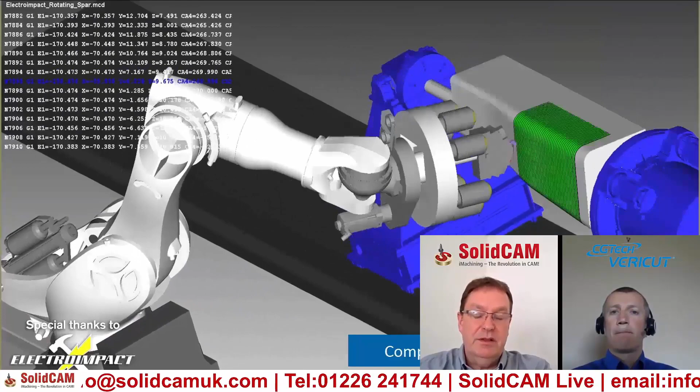Yeah, it's obviously the tools that you've got in there, you're checking and double checking yourself as well. Exactly. Obviously, we're doing these seminars online because of the current situation. I'm sure it's affected you guys as well. We're trying to help people remotely at the moment, though we are working towards getting back in the workshop, the technology centre, to do training. Are you guys approaching this as well in some way?

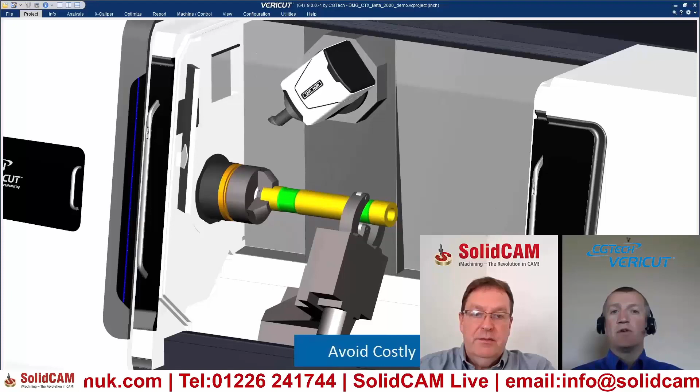Yeah, pretty much the same really, Ian. We're holding web training courses because certain customers don't want our engineers on site. They can be bespoke to the customer's requirements, or like a classroom environment, where we're just going through the standard material for Vericut.

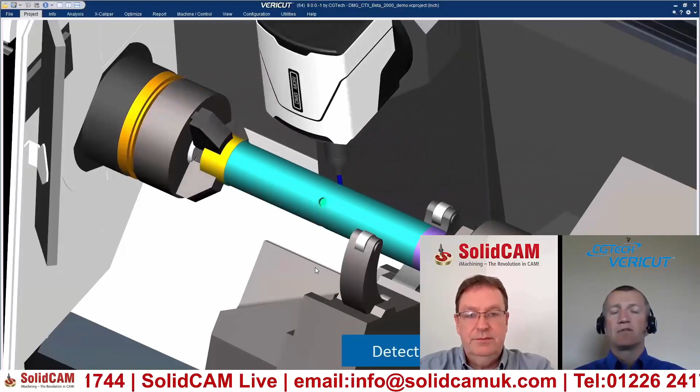And we always hold our seminars towards the back end of the year, September onwards. We did have 5 booked in for this year, but as that gets ever closer, and you might have 30 plus people there, we've pretty much resigned ourselves to the fact that we're not going to be able to deliver those. So we are teeing up, we haven't publicised it yet, virtual VUEs. The VUE being a Vericut user exchange.

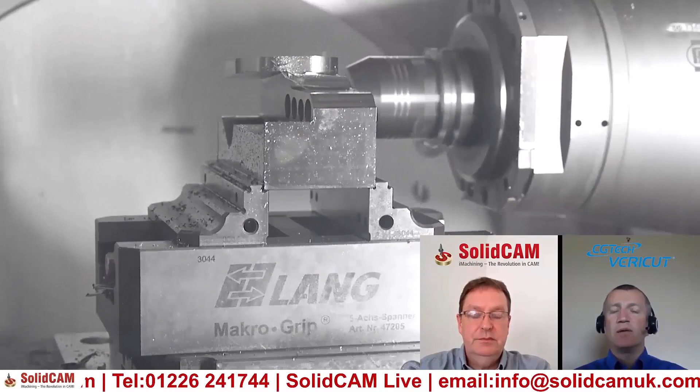So again, it's telling our customers what's in the latest version, ensuring they know that it's there, and helping them with tech tips and tricks, so our engineers can deliver that. It won't be the same as seeing people face to face, but it's possibly the next best thing.

SolidCAM as a company have tried to help people by offering licenses for them to work remotely. Is that something that CGTech's doing as well? Yeah, it is, Ian. We've got something called a cert license that we can issue. As long as the customer's on maintenance, we are more than happy issuing cert licenses, and that gives them a license which is separate from their main server. And it enables individuals to work remotely.

A lot of companies can't access their main server. Some people can use a VPN, but a lot of people, if it's military, for example, can't, because of security and what have you. So they've got to have that capability offline. So that's something that we've been offering.

We've been doing it with our current customers for a long time, and the beauty of it is, if you've got NC programmers sat at home generating programs, they can prove it out at home as well, so they can confidently release that program to the shop floor without even being there, and they know it's going to do what it's supposed to do. Yeah, and having code that you know is correct is absolutely crucial to everything, really.